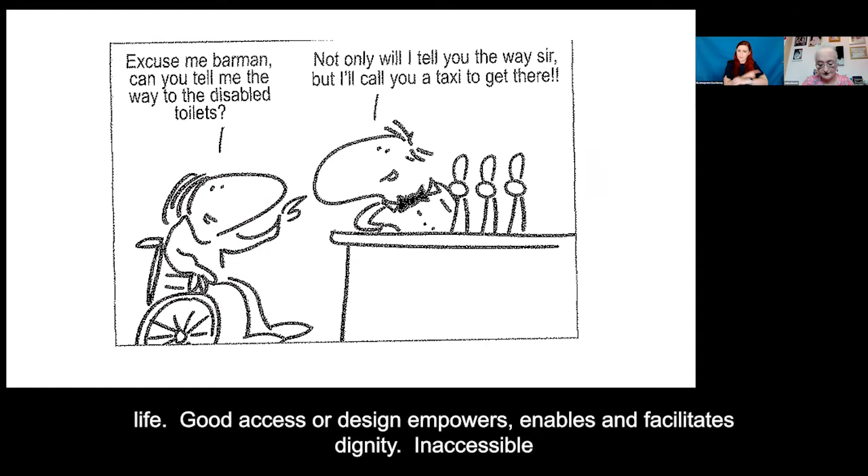Accessibility to the built environment significantly impacts on a person's everyday life. Good access or design empowers, enables, and facilitates dignity. Inaccessible environments create disabling barriers, which have a significant impact on the lives and choices of people with mobility impairments, and indeed our wider networks of family and friends.

The slide you'll see here today is a cartoon where the disabled person says, 'Excuse me, barman, can you tell me the way to the disabled toilets?' And the barman says, 'Not only will I tell you the way, sir, but I'll call you a taxi to get there.'

I sincerely hope that as we emerge from two years of lockdowns and restrictions, wider society may have gained a greater understanding of the impact that social interaction and freedom of access has on our mental and physical health and well-being. As a wheelchair user who often has to plan professional and social activities around accessible toilets, it was quite interesting, to use one word, to hear people on the radio complaining about temporary restrictions to access and public toilets being closed.

I'll come back to the issue of accessible toilets later in my presentation. We are here today to launch the new European standard on accessibility and usability of the built environment. But I think it's worth acknowledging the historical, societal benefits of universal design.

For example, voice-to-text software was originally created to facilitate the access needs of those who are unable to physically type or those who have literacy difficulties. However, these days, voice-to-text is a widely used communication method in business and general society. Automated doors make access easier for most people, and lower counters facilitate children and people who are of shorter stature.

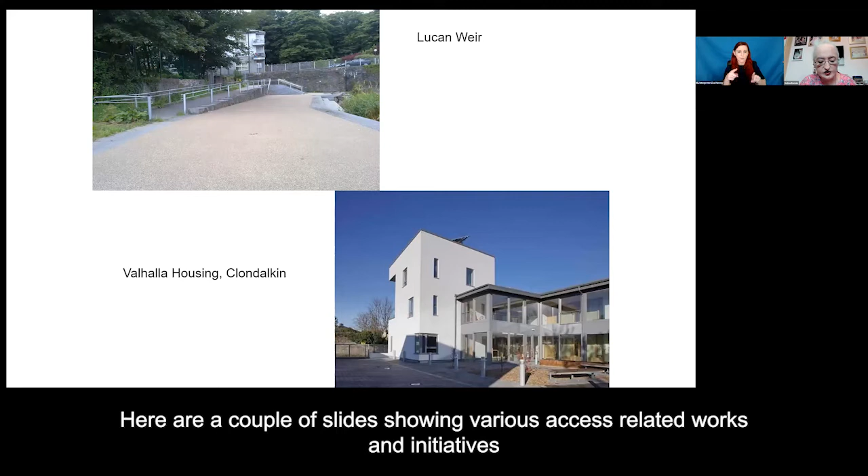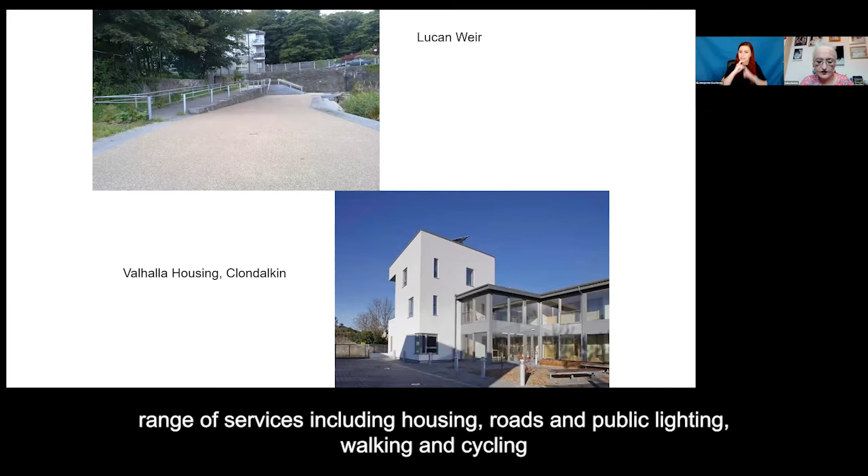What I have here now is just a couple of slides showing various access-related works and initiatives across South Dublin County. We have Lucan Weir and Valhalla Sustainable Accessible Housing in this first slide. South Dublin County Council provides and funds a broad range of services, including housing, roads and public lighting, walking and cycling routes, parks and playgrounds, libraries, litter control, art centres, and community infrastructure. It also serves as a platform for local democracy, with 40 councillors distributed across 6 electoral areas.

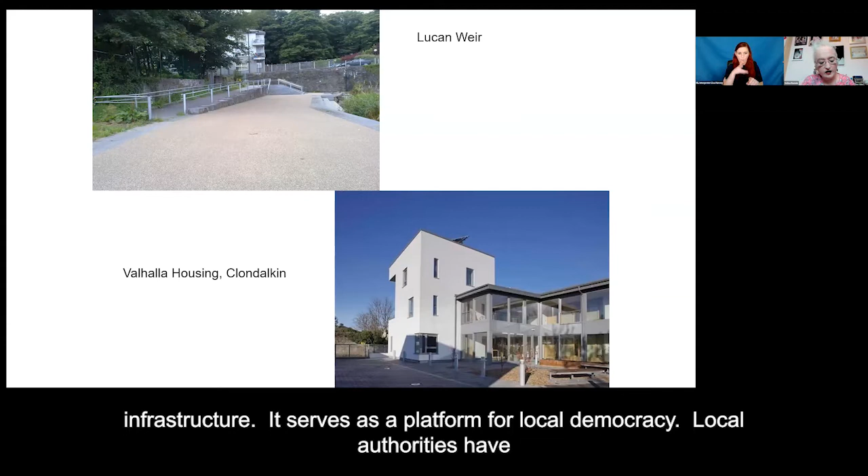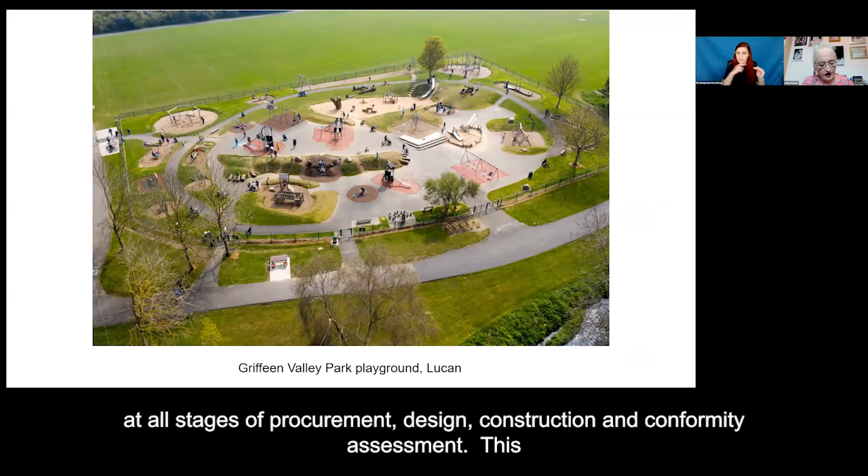Section 4.5 of the European standard states that accessibility should be integrated at all stages of procurement, design, construction, and conformity assessment. This way of working is not a new concept within South Dublin County Council. A core value of our corporate plan is inclusiveness, equality, and accessibility, and an overarching consideration with our current development plan includes a reference to creating socially and physically inclusive neighbourhoods.

I'd like to take a little moment to tell you about our inclusive play spaces programme to demonstrate this. The slide on screen now is an aerial shot of one of our accessible play spaces in Griffeen in Lucan. We build playgrounds and play spaces with the assumption they're places for everyone to play together. We see inclusiveness as centrally important to all of our play spaces and aim to create places that meet the diverse needs of children, their parents, their grandparents, and other caregivers.

We avoided plastics and used natural materials where possible. In addition to environmental and sustainable benefits, using natural materials has provided significant sensory benefits. And we've now started to focus on the design and installation of communication boards to further enhance the accessibility of the spaces.

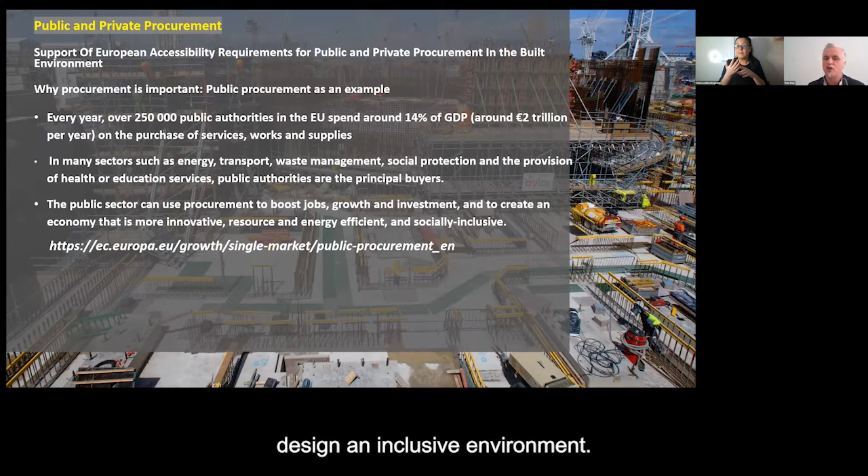Over 250,000 public authorities in the EU spend around 14% of GDP, that's 2 trillion euros, on the purchase of services, works, and supplies. A huge amount of money that could be used towards developing a more inclusive environment. In many sectors such as energy, transport, and waste management, public authorities are the principal buyers. The public sector can use procurement to boost jobs, growth, and investment. But most importantly, from the point of view of standards like this, it's a mechanism to procure, manage, operate, and design an inclusive environment.

So to go back for a moment to the three documents. The first, the main document, is scoped to describe basic minimum functional requirements and recommendations for an accessible, usable built environment following Design for All and Universal Design principles, which will facilitate equitable and safe use for a wide range of users including persons with disabilities. The requirements and recommendations are applicable across the full spectrum of the built environment, from outdoor and public spaces through to more detailed elements.

You'll see that spoken about in a little while. The functional accessibility and usability requirements are also applicable to existing buildings as well as new builds, so they're useful for adaptability and retrofit. I won't go through all of these, but the contents, as I said, go across the full spectrum of the built environment.

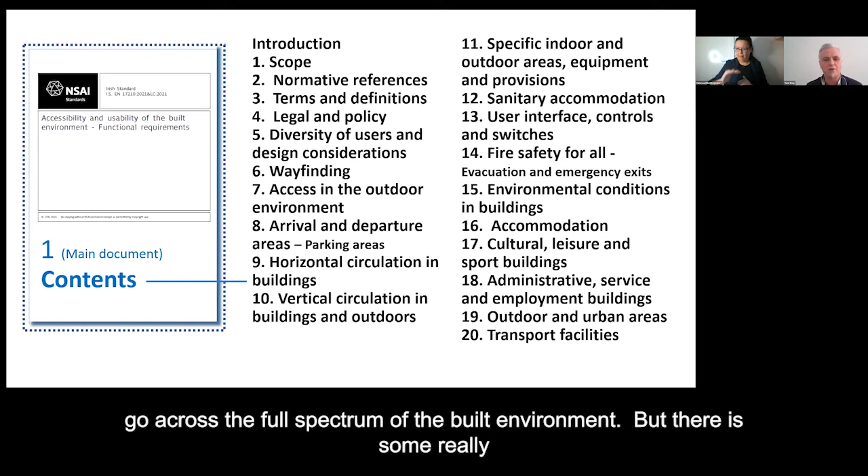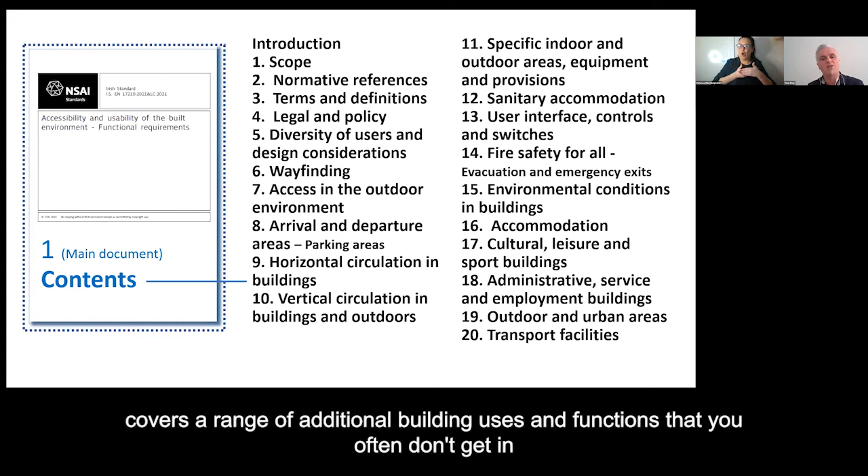There's some really great material here. Section 5 looks at diversities of users and design considerations, a fantastic piece of the document. Then we move from wayfinding and access in the outdoor environment through to very specific criteria for internal spaces such as sanitary accommodation. It also covers a range of additional building uses and functions you often don't get in standards like this, such as recommendations around cultural, leisure, administrative, outdoor leisure areas, transport facilities, and so on. So a very comprehensive document.

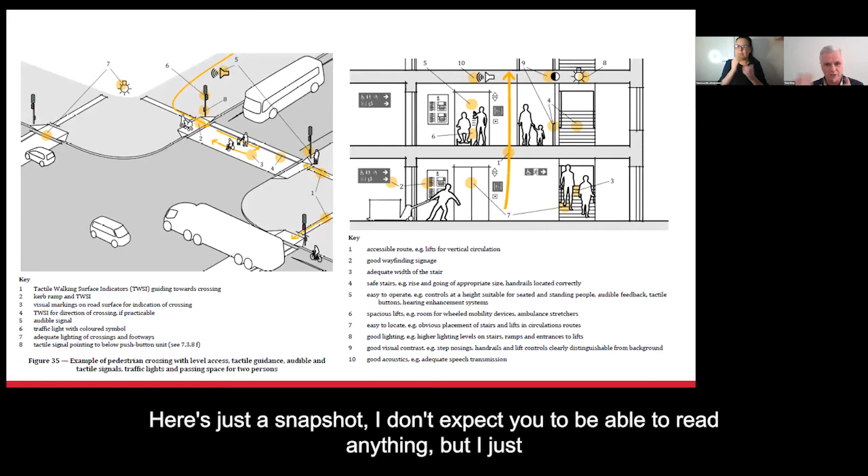Here's just a snapshot. I don't expect you to be able to read anything, but I want to give you a sense of the information contained in 17210. It's full of really fantastic illustrations, one of its real strong points, and these are used in a very powerful way to communicate some of the key messages.

Now to move on to the second document, the technical performance requirements and criteria. Here specific and detailed criteria are given to fulfill the requirements in 17210, and in that document you now start to see specific values and a lot of detail.

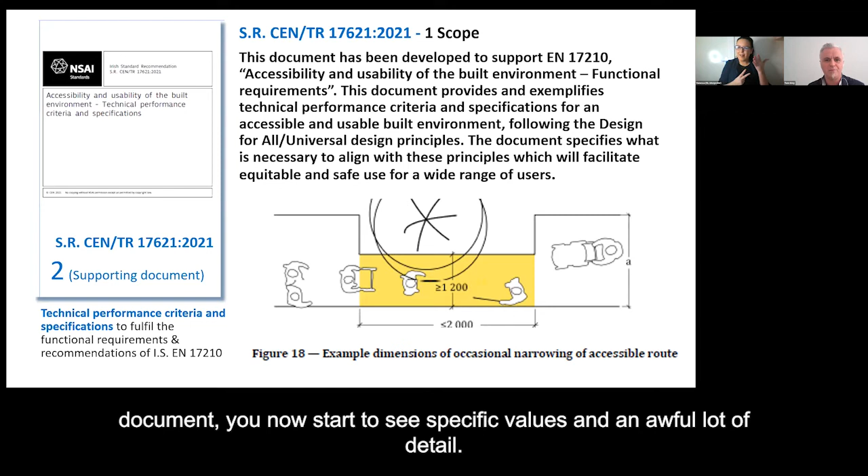Later on in the webinar we'll have Eoin, Caitríona, and Fionnuala, and they'll talk in a bit more detail about applying the standards and look at this in more depth, putting a bit of flesh on the bone, so to speak. But in the meantime, I'm going to hand you over to Ruth, who's going to give you a little bit of background and context. Thank you.

Thank you very much, Tom, for that introduction and background to the standards. Now I'm going to step back a level and talk about the context in terms of policy and legislation, the context in which we'll be using the standard.

Selina spoke to us about the impact the design of the built environment had on her everyday life. At the Centre for Excellence in Universal Design, we work to promote universal design as good design that works well for everyone, across the built environment, which is our focus today, but also across products, services, and ICT. In practice, the design of built environment, products and services, and ICT all need to come together for an overall design to be inclusive for everyone.

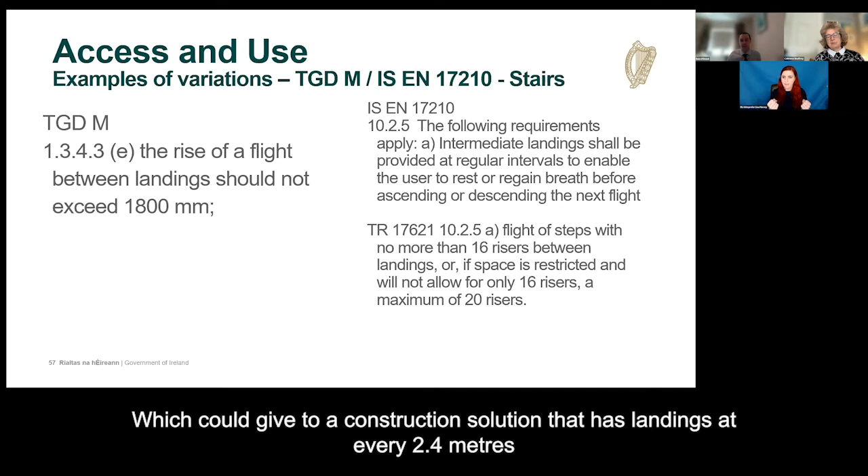Under the supporting standard TR 17621, it specifies 16 risers between landings, or spaces limited to no more than 20 risers, which could give a construction solution with landings at every 2.4 meters, different from that of TGDM. So in designing buildings, care does need to be taken to make sure that the minimum standards are being met.

At the moment, Technical Guidance Document M is out for draft public consultation to enhance its provisions to include changing places facilities in the built environment, to facilitate greater use of the built environment by individuals irrespective of ability.

Under 17210, the requirements for changing places facilities are specified for large transport facilities, roadside petrol service facilities, retail and leisure complexes, without going into detail of what constitutes a large transport facility or a large service facility.

When we look at the proposed list of requirements in TGDM, there's a far broader scope of application of the CP facilities: hospitals, care centres, assembly buildings, schools, offices, shops, shopping centres, hotels, etc., with minimum floor areas or area capacities that apply and are specified in detail in the TGD.

So again, EN 17210 can be used as an alternative approach. The provision is made in legislation. However, care needs to be taken in the use and direct application of the provisions, to make sure that the minimum performances in the TGD are still being met and that the policies set out through the TGDs are being obtained.

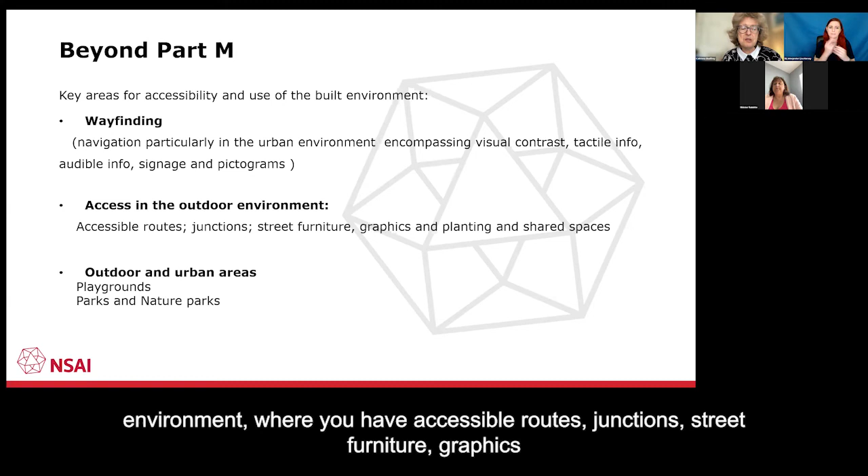These all come into play very much in the main areas I'm going to speak about, which are wayfinding, particularly navigation in the urban environment, where visual contrast, tactile info, audible info, signage and pictograms all come into play and sometimes conflict with and cause confusion. Access in the outdoor environment, where you've got accessible routes, junctions, street furniture, graphics and planting, and shared spaces, which is both a positive and a difficult thing to do very well.

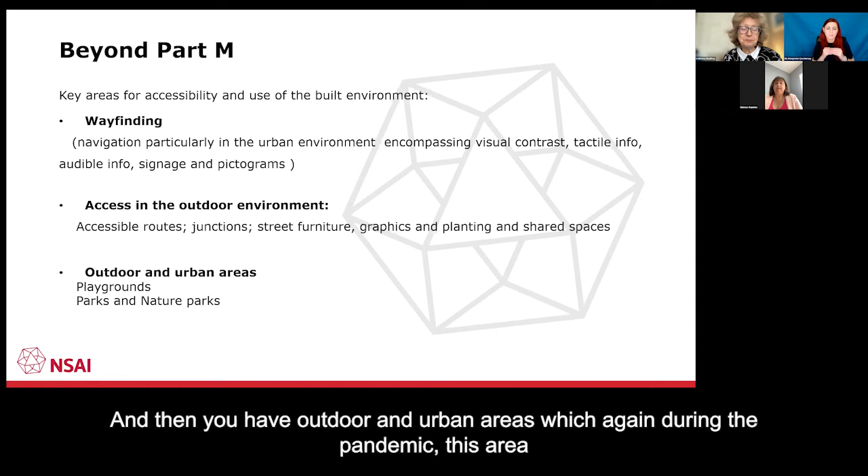And then you have outdoor and urban areas, which again, during the pandemic, this area became so much more important to all of us. Playgrounds, parks and nature parks, and access to green spaces.

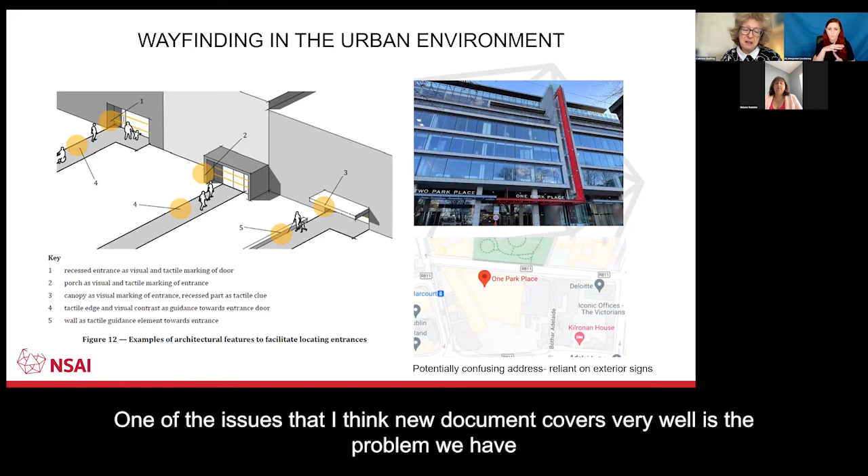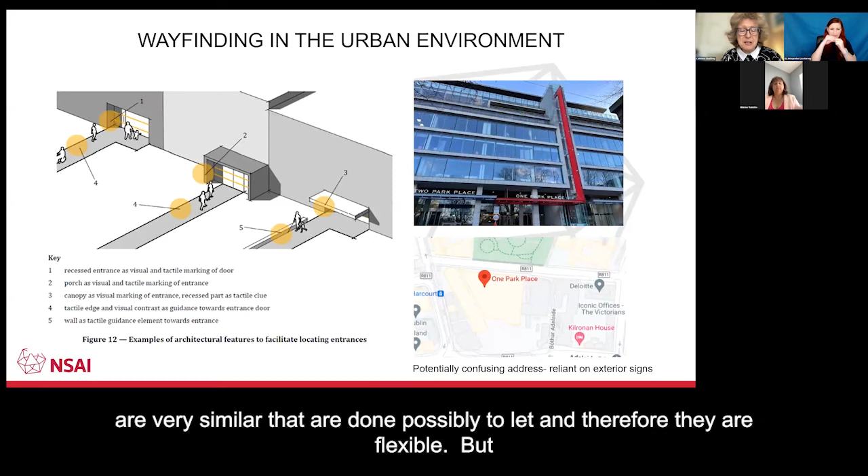Now in the next slide, you'll see in terms of, could I have the next slide please, wayfinding in the urban environment. One of the issues that I think this new document covers very well is the problem we have with modern buildings, particularly in large estates, where you have buildings that are very similar, done possibly to let, and therefore they are flexible. But because they're flexible, they lack an awful lot of character and indicative marks.

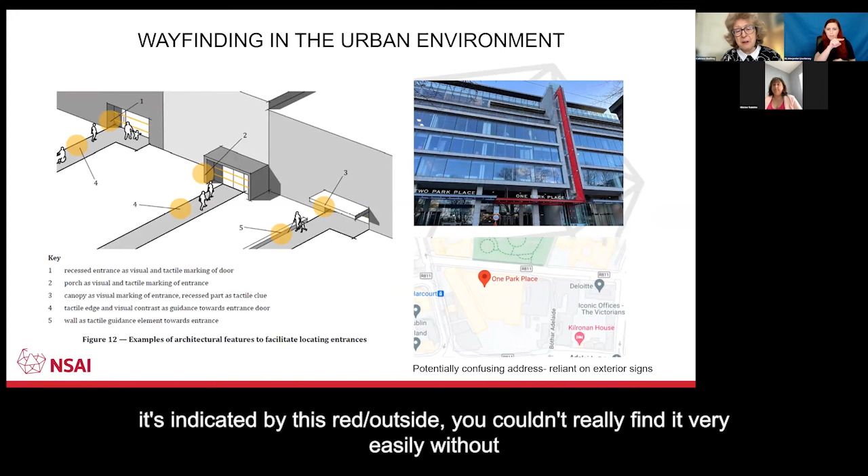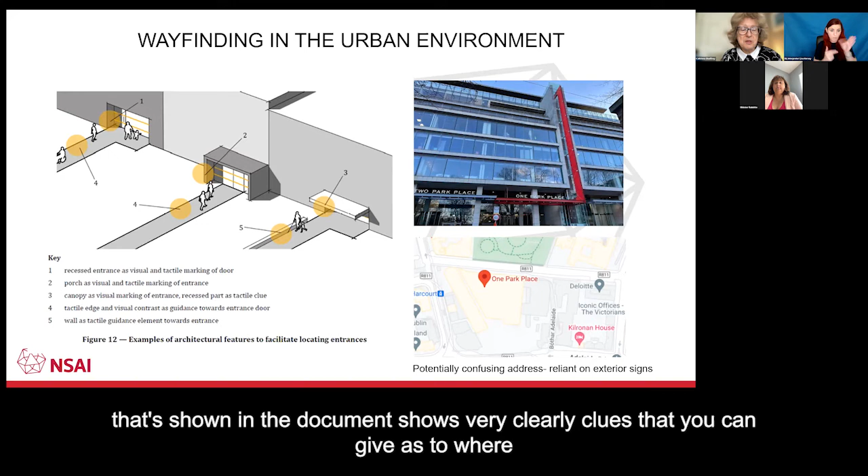So you find, say for example, here on the right-hand side, you've got a building halfway down a street, or nearly halfway, and it's called Number 1 Park Place, indicated by this red slash outside. You couldn't really find it very easily without that. So this is where graphics has to be applied to a building. And the diagram shown in the document shows very clearly clues that you can give as to where an entrance might be and how you would highlight it.

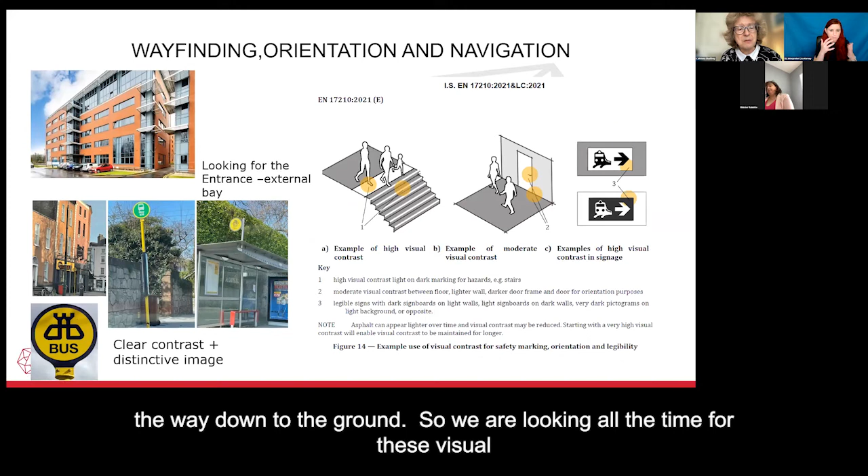Could I have the next slide please? So again, on the top left there, you can see a building where the only clue you have as to where the entrance might be is because there's a projecting bay that goes all the way down to the ground. So we're looking all the time for these visual clues.

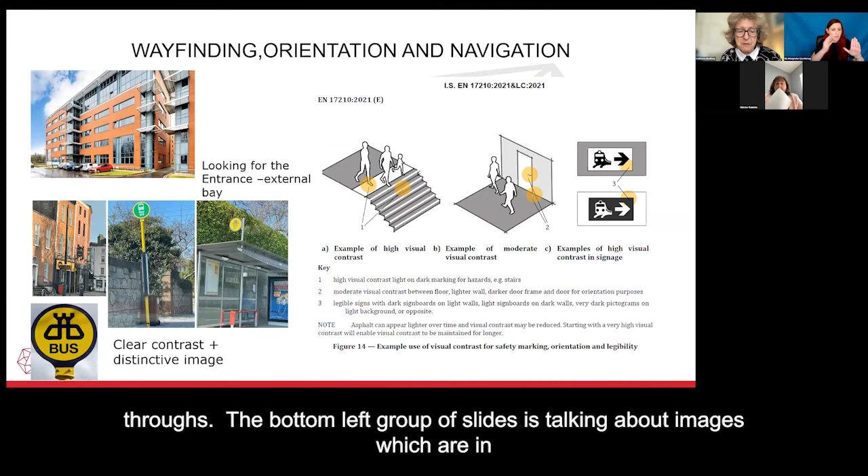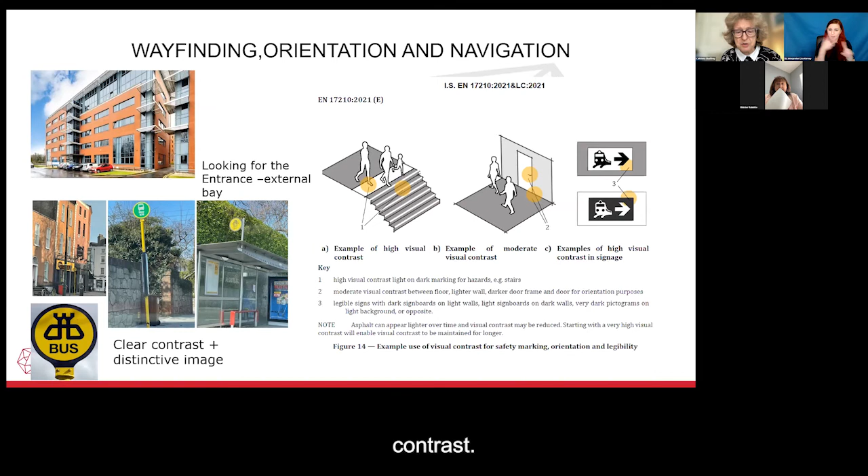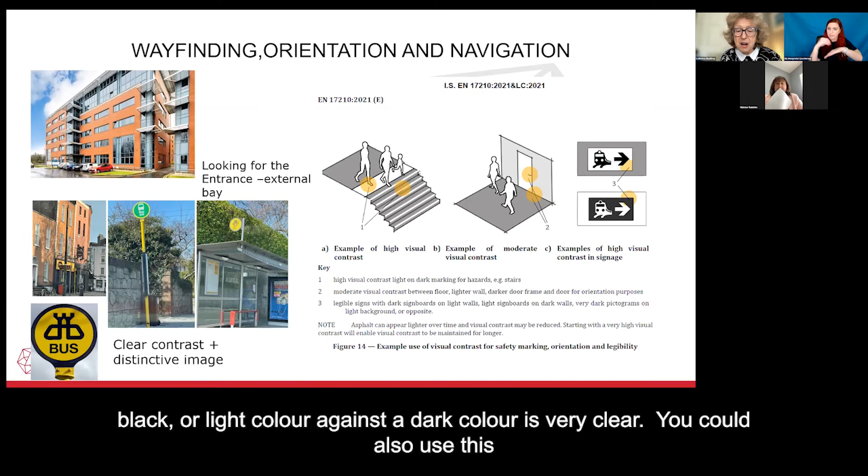Also, when you have signage, you have good contrast, you know, black on white or white on black, or light color against a dark color is very clear. You can also use this to highlight things like doorways or steps so that you know when or where the hazard is going to be. Could I have the next slide please?

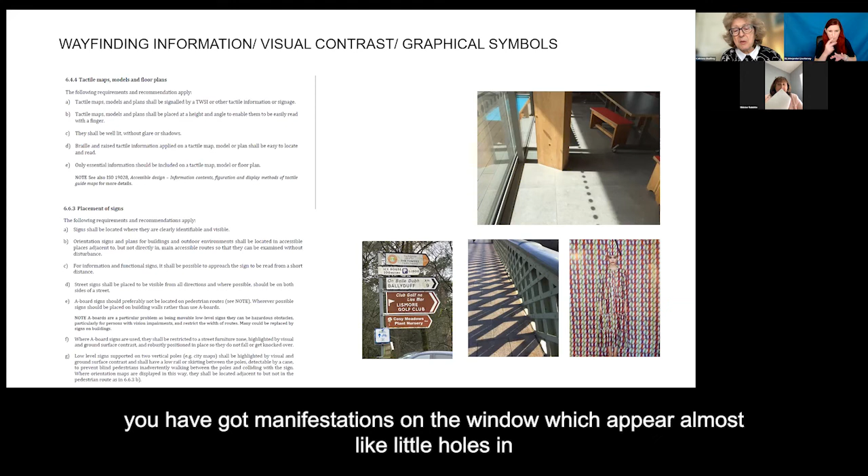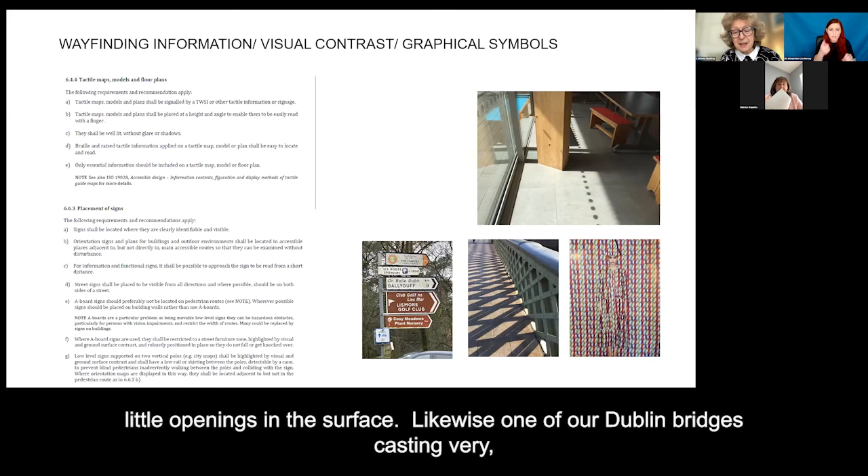One of the difficult things is pattern and people not fully understanding it. The bottom image shows someone wearing clothes the same color as the background, making it hard to discern the object. Top right shows manifestations on a window appearing like little holes in the surface, which can be difficult for people with dementia, who think there are openings there. One of our Dublin bridges casts big shadows that could read as an obstacle, but it's just sunlight. The bottom left shows how a plethora of signs makes it hard to focus and read clearly.

Could I have the next slide, please?

Could I have the next slide, please?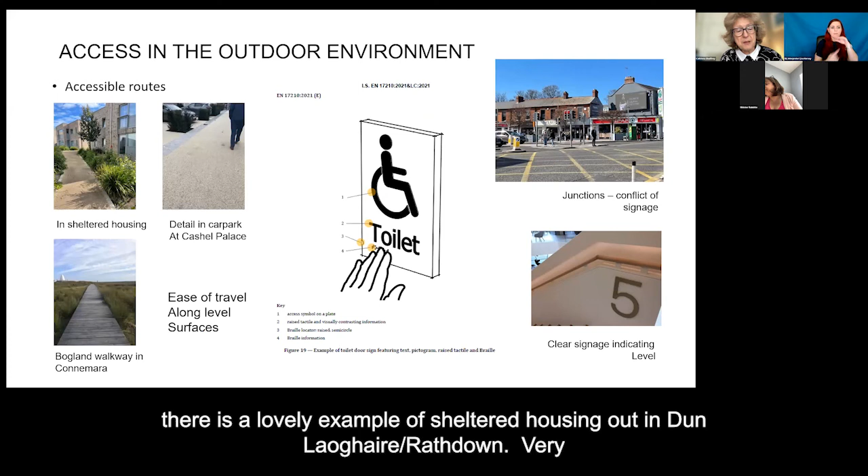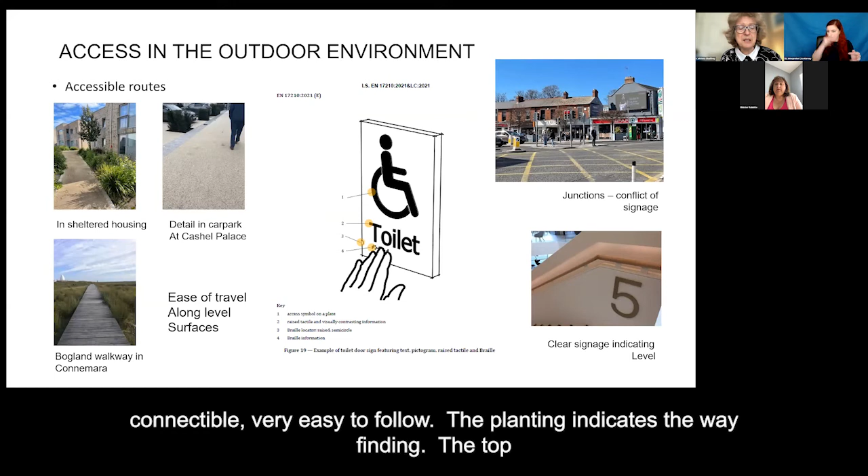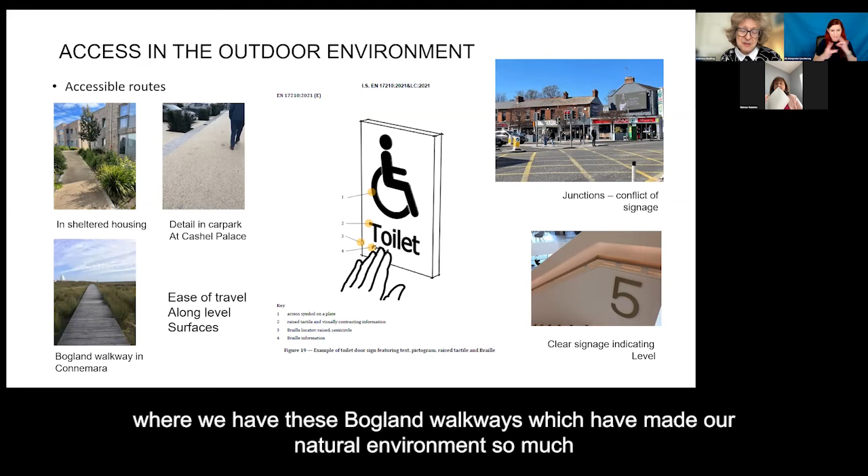In the outdoor environment, this is an area that has really improved, and this document will help pull it along further. The top left photo is a lovely example of sheltered housing in Dun Laoghaire-Rathdown - very connectable, easy to follow, with planting indicating the wayfinding. Top right is a recently completed car park at Cashel Palace with level surfaces and good drainage, not a trip hazard. Bottom left shows bogland walkways that have made our natural environment much more accessible to buggies, wheelchairs, and the general public.

Then there are areas like the top right, where there's a serious conflict of signage - so much going on that it's really difficult to know exactly when and where you should cross.

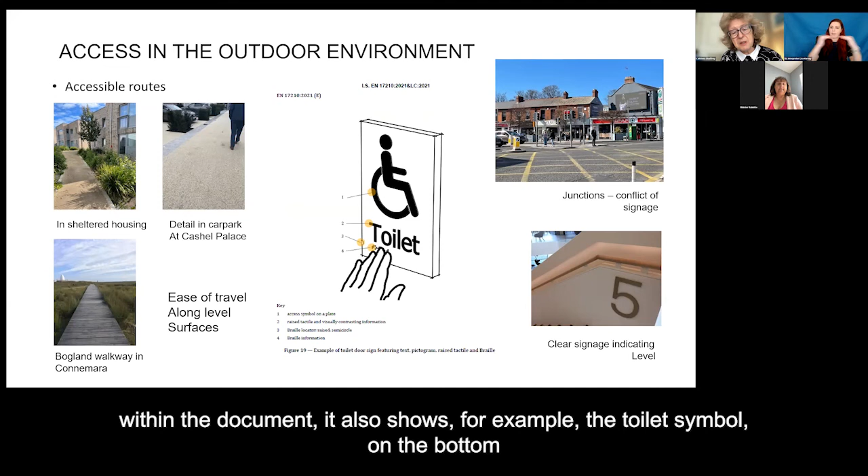Clear signage, like this example inside a building, is very simple and obvious - you're going to level 5. The document also shows the toilet symbol, and on the bottom left, symbol 3 has a little indicator showing where the Braille and raised lettering will be, so it's very clear what's going on where.

Could I have the next slide, please?

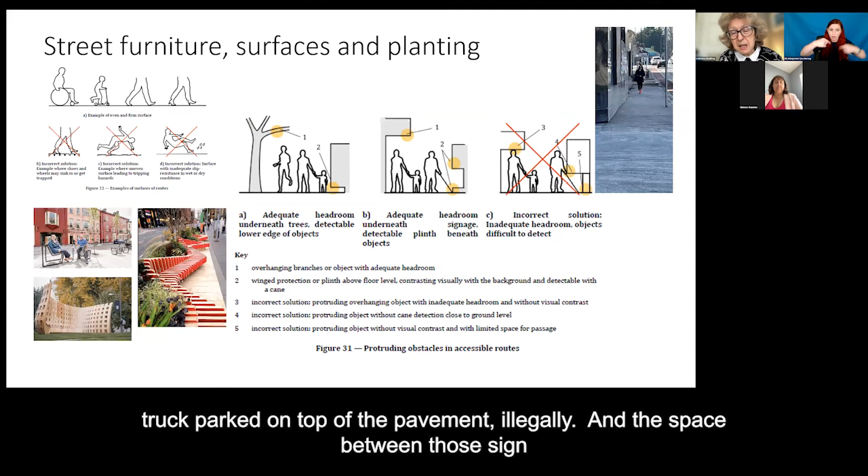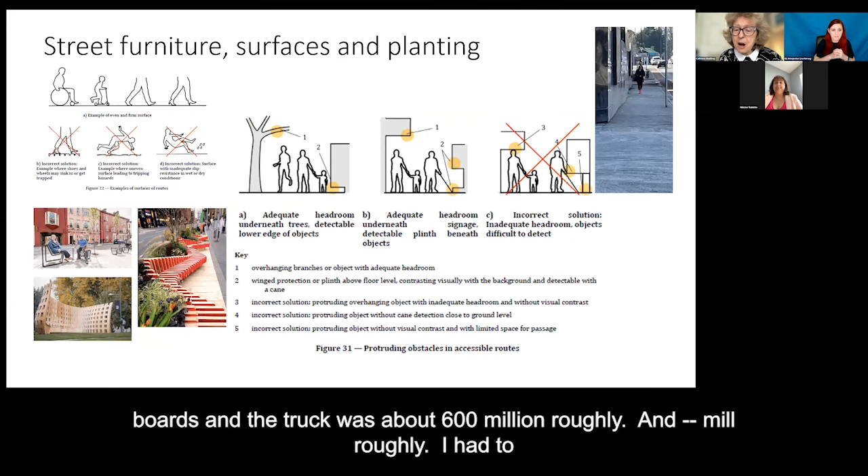Again, street furniture and planting - the top right slide illustrates a situation I want to describe. I was with someone visually impaired, and there was a large truck illegally parked on the pavement. The space between the signboards and the truck was about 600 mil, and I had to grab her arm to stop her walking into a projecting sign that extended about 150 mil, when only 100 mil is allowed. Normally she wouldn't have walked that close, but because the truck was there, she was walking closer to the boundary wall.

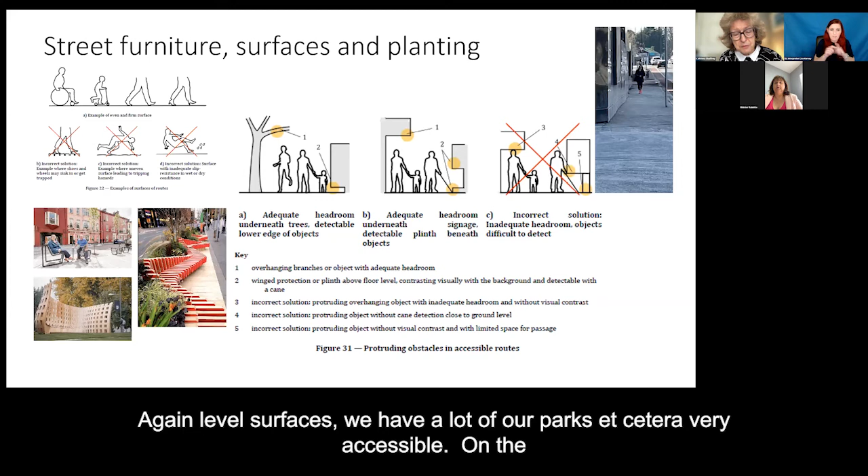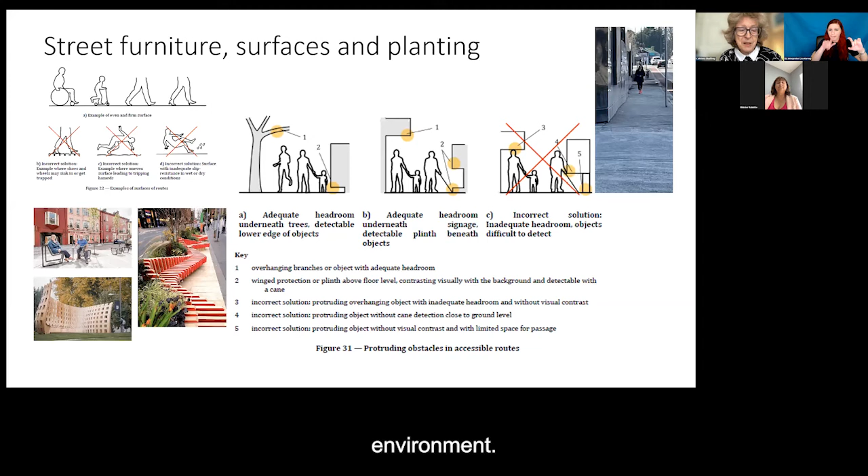Again, level surfaces - this is an area that's improved hugely, with many of our parks now very accessible. In the bottom slides, the top one is Clonakilty, a wonderful example of a street where older people can sit and rest, making for a very convivial environment. The other two illustrations show breakups of areas which make them much more accessible.

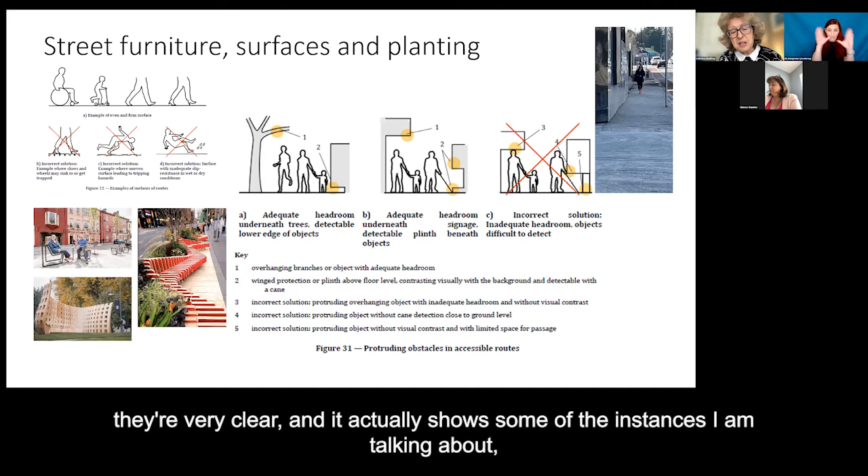These diagrams in the middle are all from the document, and I think they're very clear. They show instances where problems can arise that are to some degree unforeseen, particularly things like tree branches that need to be maintained.

Could I have the next slide, please?

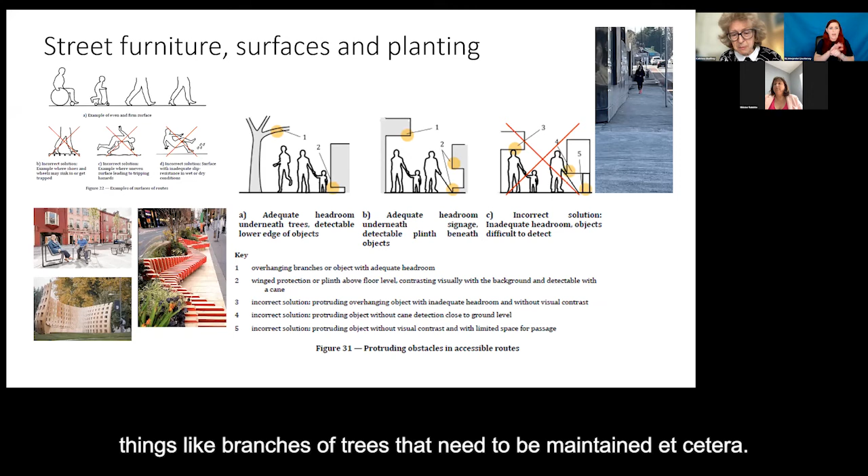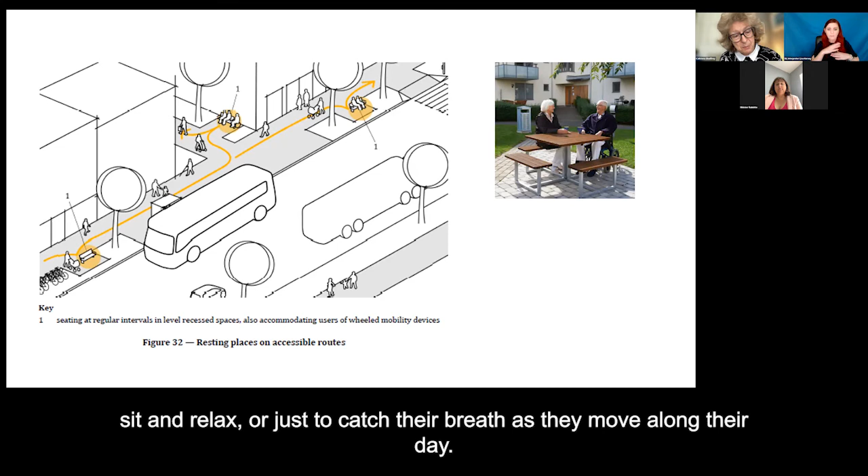Again, when we're designing our city streets, having places to stop and sit, to break up spaces so that it's not just all about the traffic flow. There are places like this where you have seating, again, possibly for older people, giving them space to sit and relax or just to catch their breath as they move along their day.

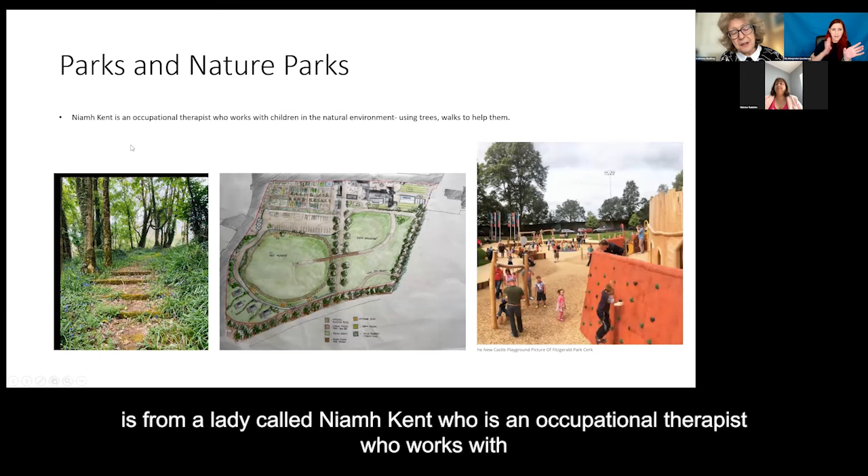Next slide, please. One of the areas that's improved hugely, I put in this slide - the bottom left slide is from a lady called Niamh Kent, who's an occupational therapist who works with children in the natural environment. Children with trouble, she gets them to hang upside down out of trees. So again, our green, diverse spaces are becoming more and more useful.

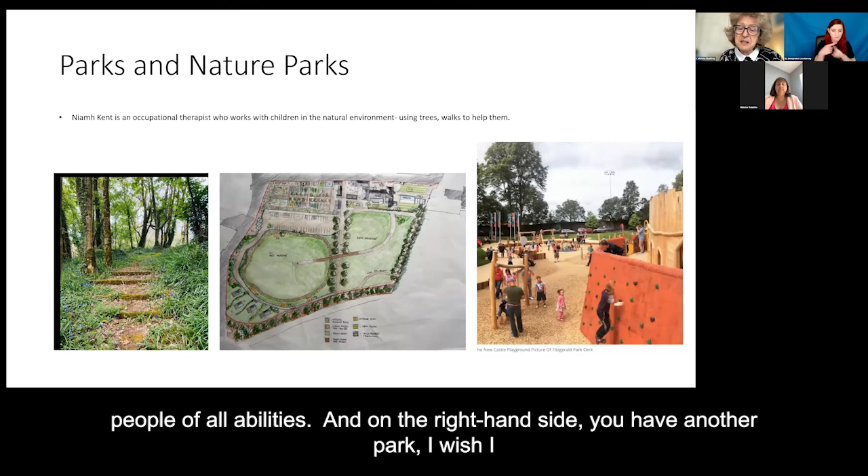The middle illustration is a potential play link area for children, for people of all abilities. And on the right-hand side, you have another park. I wish I had seen the earlier park that Selina had. It looked like a really interesting space. Next slide, please.

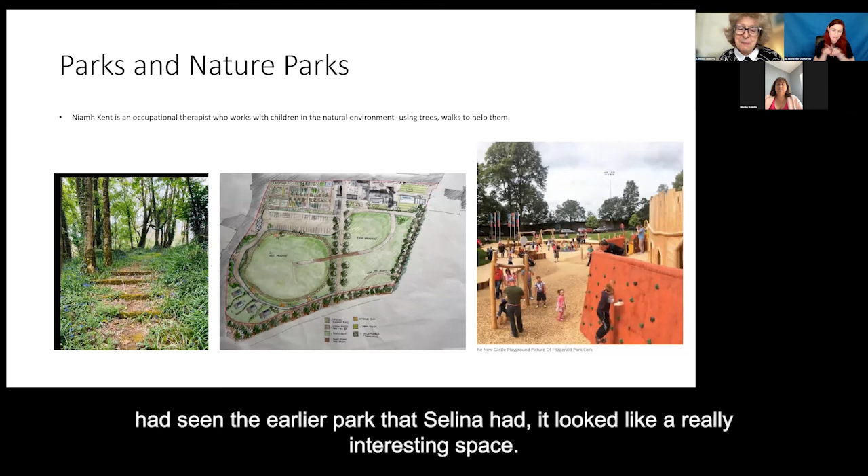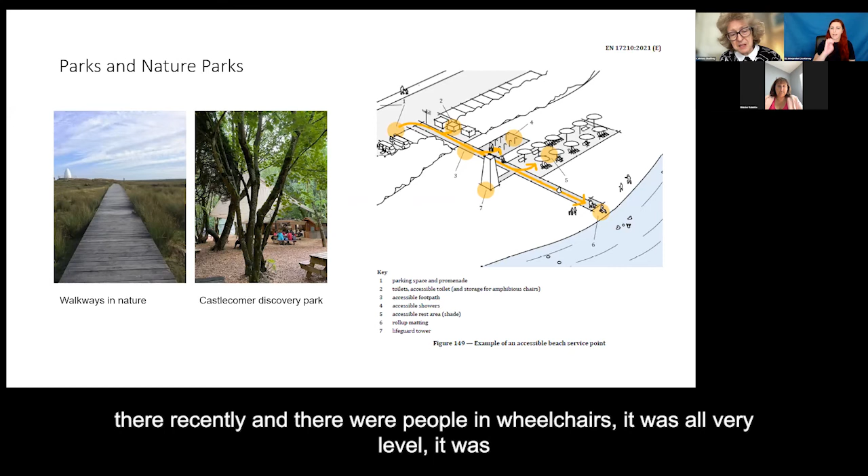Again, walkways in nature, just talking about parks and nature. This is again where the document really starts pulling things on for us, making us look at things, how we can improve, how we can develop. This is Castlecomer Discovery Park. I was down there recently and there were people in wheelchairs. It was all very level. It was all very easy, which is, I think, how it should be.

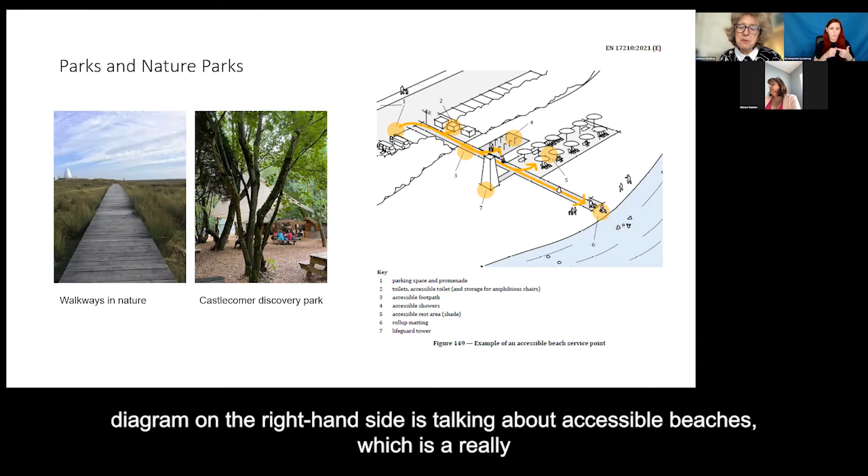And the other diagram on the right-hand side is talking about accessible beaches, which is a really interesting area and a really good area that should be looked at very closely. Next slide, please. So in conclusion, EN 17210 brings more detail to the external environment, but there are further developments that are likely to happen. And the next section on problems that arise in practice will now be illustrated in the next presentation by Fionnuala Rogerson. Thank you very much.

Thank you very much, Caitríona and Eoin. I suppose setting the national context, it's not straightforward how standards be integrated not only at a national level, at a regulatory level, but also as Caitríona highlighted, the practical issues on the ground that we still have to resolve and work through. So we have next Fionnuala Rogerson, who is a Fellow of the Royal Institute of Architects in Ireland.

A practicing architect and author of several publications on universal and inclusive design. For over 20 years, she was director of the International Union of Architects work program Architects for All, working with architects globally to promote inclusive universal design as a fundamental component of architectural quality and sustainable built environments. She was a member of the CEN research team, which completed the first stage of the EU mandate, leading to the development of EN 17210. She is currently working with several NSAI and ISO standards committees on accessibility and usability of the built environment, including heritage sites. So delighted to have Fionnuala here presenting.

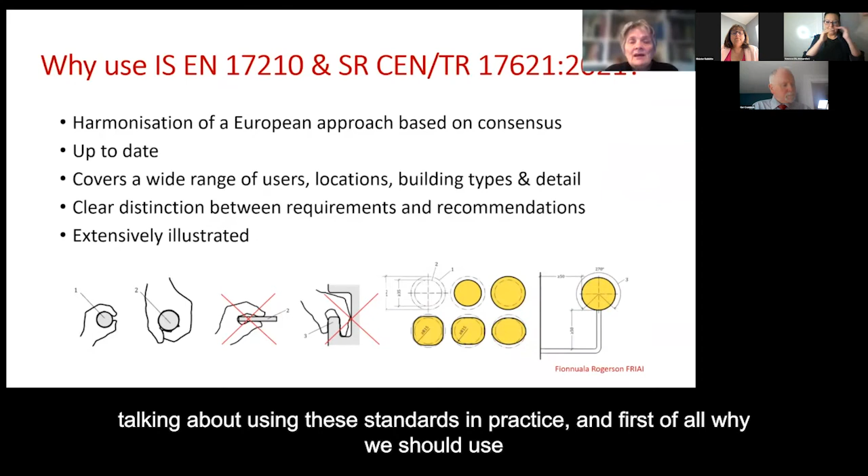Thank you, Ger. Hello, everybody. I'm delighted to be here with you today. I'm going to be talking about using these standards in practice, and first of all, why we should use them.

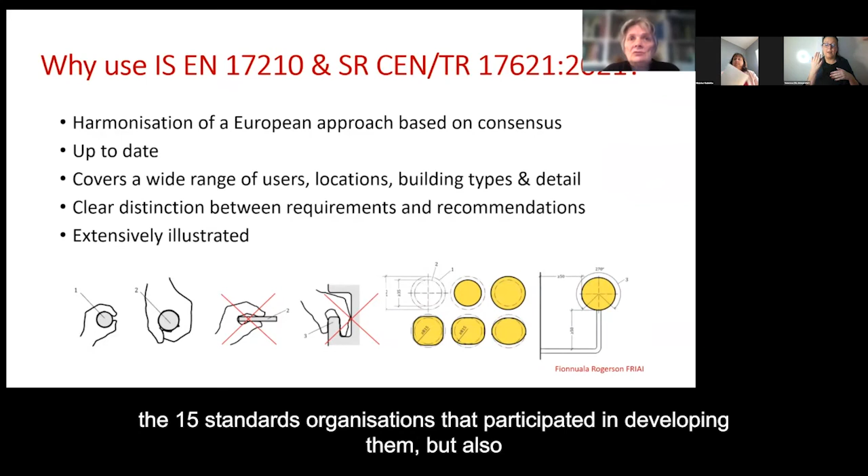They cover a wide range of users, locations, building types, and details. There's a clear distinction made between the requirements and the recommendations, which I'll explain further on. And they're extensively illustrated, which is quite unusual for standards. Particularly for us as architects, it's great to have a standard that is illustrated, not only with good examples, but also it does show some examples of what not to do. And in the TR, it gives examples of the technical requirements in graphic form.

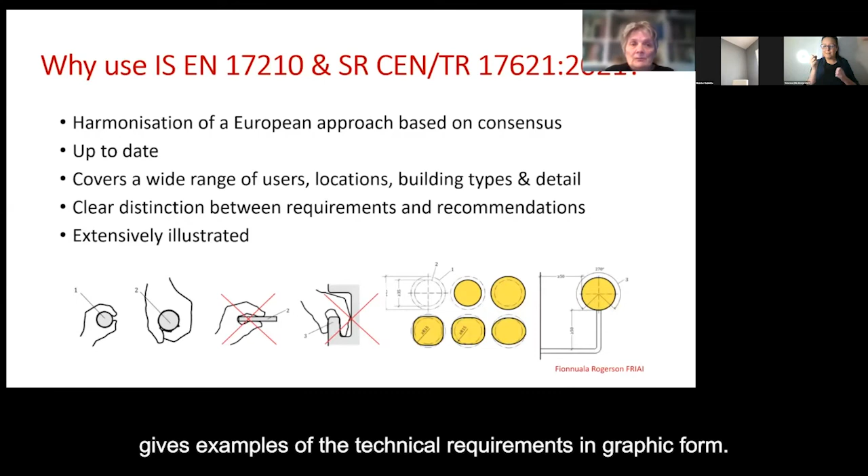The diversity of users and design considerations that are not covered by the technical guidance document Part M include things such as immunological functions, allergies and hypersensitivities, physical abilities, whilst Part M includes or is based on independent use of the built environment. The EN 17210 also includes situations where people may require assistance, voice and speech functions, and also cognitive abilities and characteristics such as perception, memory, decision-making, dyslexia, dementia, and autism, amongst others.

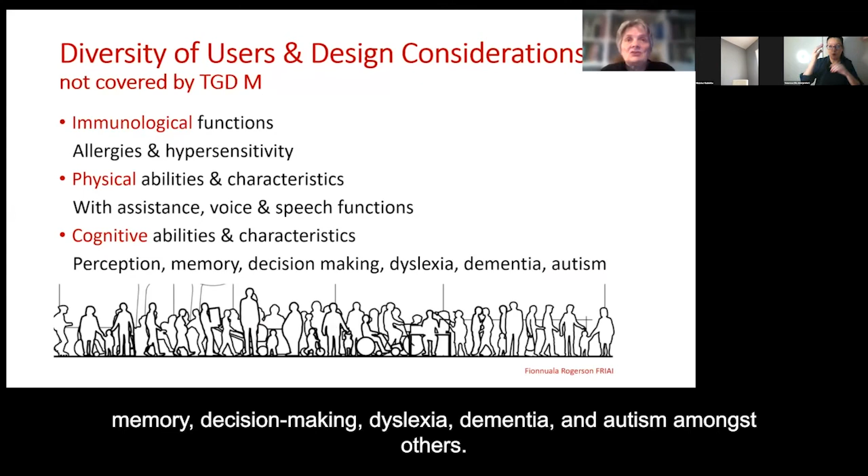Basic functional requirements which aren't covered in the technical guidance document include wayfinding, which Caitríona has spoken a little about. Outdoors, she also mentioned routes, plazas, shared space, guidance paths, bridges, underpasses, and the like. It covers a lot of external areas such as arrival and departure areas.

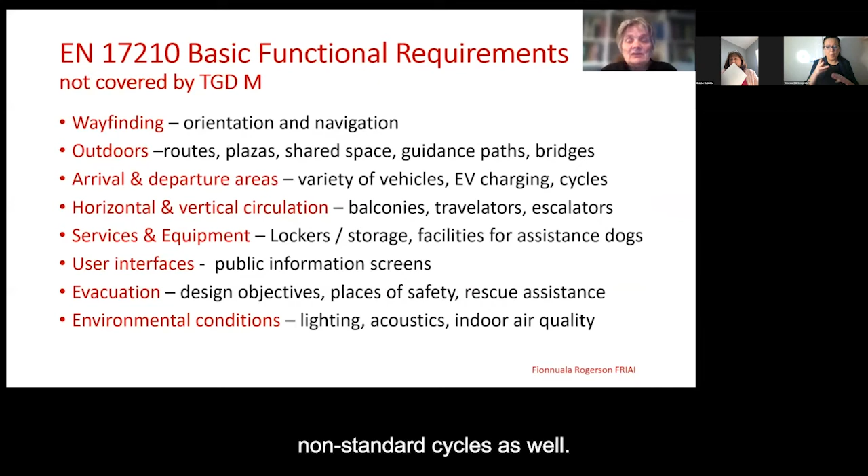It covers the kind of variety of vehicles that you would normally meet, not just cars, but also coaches, taxis, minibuses with side access, rear access, electric vehicle charging, cycles and non-standard cycles, which more and more people are beginning to use to mobilize in urban areas, and parking for non-standard cycles as well. The kinds of things that aren't covered under M in relation to horizontal and vertical circulation include travelators.

And escalators. There's guidance on balconies, and this is something that we've had recent problems with, which have had to be referred to An Bord Pleanála to make a decision on in relation to the TGD.

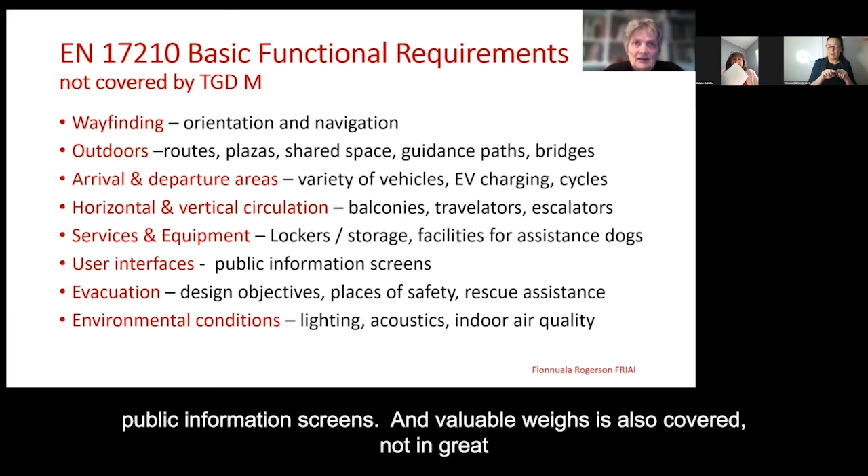Services and equipment, facilities for assistance dogs are covered, lockers, storage, public information screens, and evacuation is also covered, not in great detail, but there is quite a detailed informative annex to the standard. You will understand the design objectives, issues such as places of safety and rescue assistance, and also covered are environmental conditions such as acoustics and indoor air quality.

Specific uses covered in 17210 that aren't covered by the technical guidance document include student accommodation, adaptable housing, libraries, museums, heritage buildings, gyms, swimming pools, and many others.

Types of administration, service and employment buildings such as banks and courts, police stations, offices, industrial, educational, healthcare facilities, as well as religious facilities. And then outdoor and urban areas, including playgrounds, gardens, parks, and beaches.

And finally, transport facilities, train stations, bus stations, coaches, metros, airports, ports, even cable cars are covered.

So when you're using the document, I believe you need the two principal documents, 17210, which is the functional standard, the functional requirements, and 17621, which is the technical report, which gives the technical detail, which assists in demonstrating that you have actually complied with the functional requirement.

So within 17210, you have a clear distinction between the things that are requirements in order to comply with the functional standard, illustrated with reference to the word 'shall'. For example, functional issues for a museum display will be described such as: exhibits shall be placed at a height accommodating everyone, captions shall be positioned at suitable height, and then when it's making a recommendation, it will describe it as a 'should'.

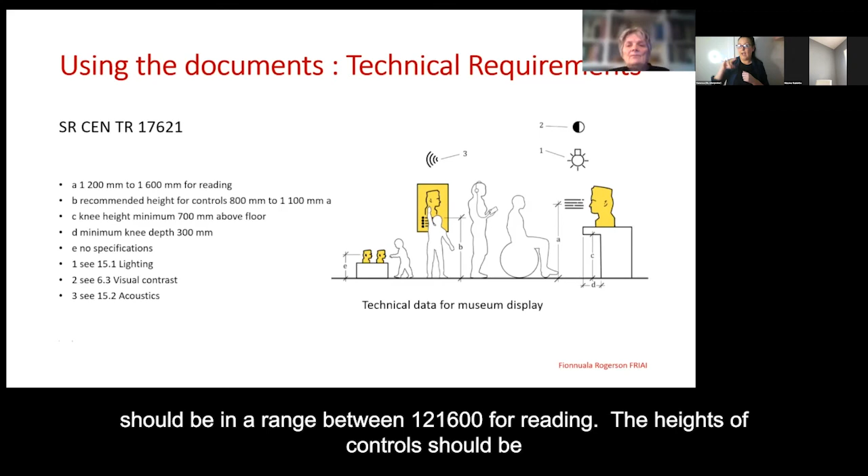Technical report 17621, you will have the same illustration with the same details, the same topics, but in this case it will give the technical requirements. For example, for a standing height user, the height of exhibits should be in a range between 1200 and 1600 for reading. The heights of controls should be at a specific height. For lighting, you're then cross-referenced back to the technical details for the levels of lighting, acoustics, visual contrast, and so on.

So you need always to cross-reference from the functional standard 17210 to the technical report 17621.

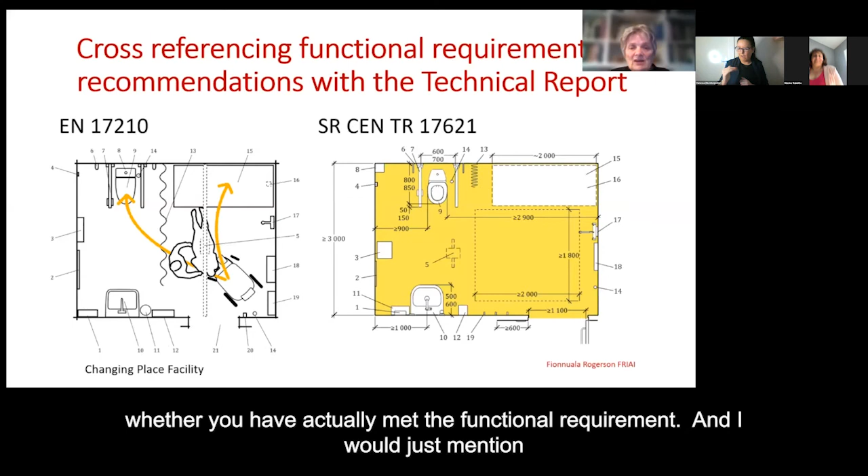Here I've just taken an example of the information provided on changing place facilities. On the left-hand side, you'll see an illustration of what is required as a function of a changing place facility, and on the right-hand side, the technical details that allow you to check whether you have actually met the functional requirement.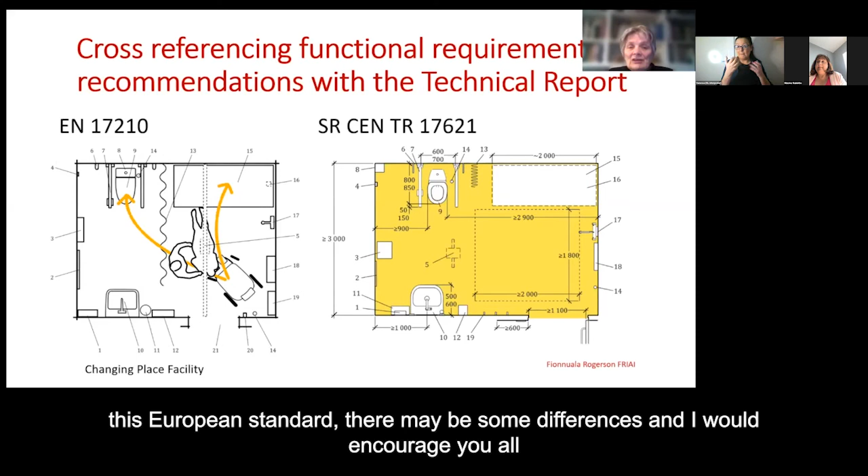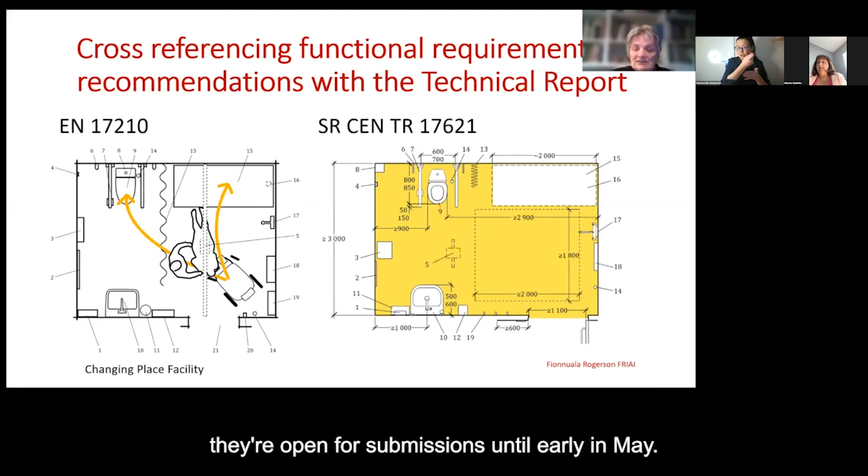I would just mention here that the draft consultation document out for the revised Part M of the building regulations, to include data on changing place facilities, is out for consultation at the moment, and I believe it has been based very much on what's in this European standard. There may be some differences, and I would encourage you all to refer to the consultation document and make submissions as you see fit. I believe they're open for submissions until early in May.

The third document, or technical report, that comes with this standard is one on conformity assessment. It describes very simply how to assess conformity based on the types of conformity, whether it's first, second, or third party—first party being self-certification—the types of functional requirements you need to consider when determining which should be applied, the reference documents you may use to ensure you have conformed to national standards, which could be building regulations or this technical report 17621, the methodology to use, and then the stages at which you should assess conformity.

And these would be inception, planning, construction, and completion.

And then there are some sample tools and templates that can be used. We're pretty well used to doing this now as designers, those of us who have acted as either an assigned certifier or design certifier, and the procedures we would normally use to assess conformity throughout the design process and through construction and on completion would be somewhat similar. So we would be used to using this type of tool.

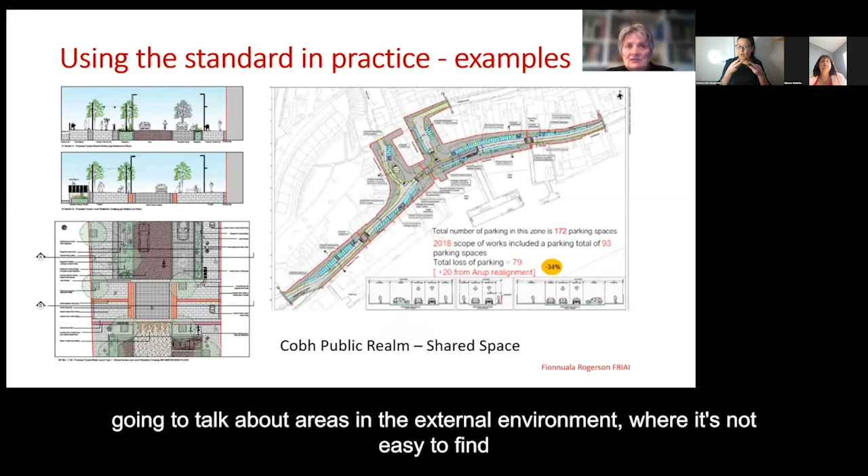I would just like to move on to giving a couple of examples of how we've been able to use the European norm in practice. In both of these examples, I'm going to talk about areas in the external environment where it's not easy to find good guidance in relation to external environments and accessibility and usability, because Part M doesn't really cover them.

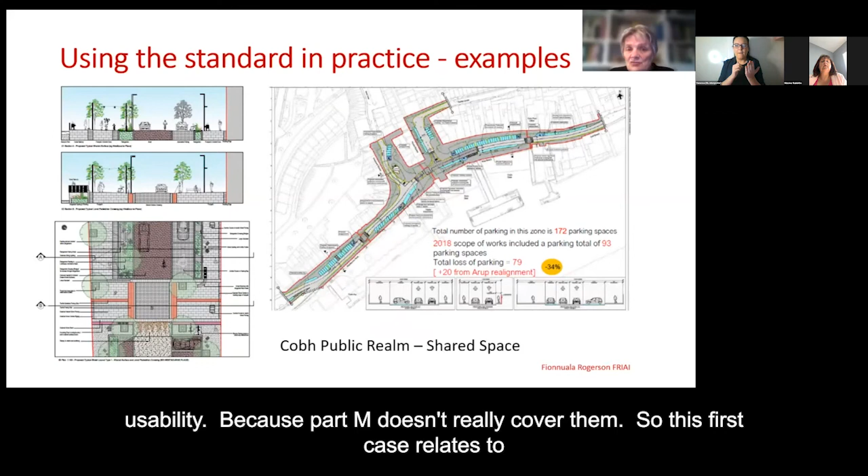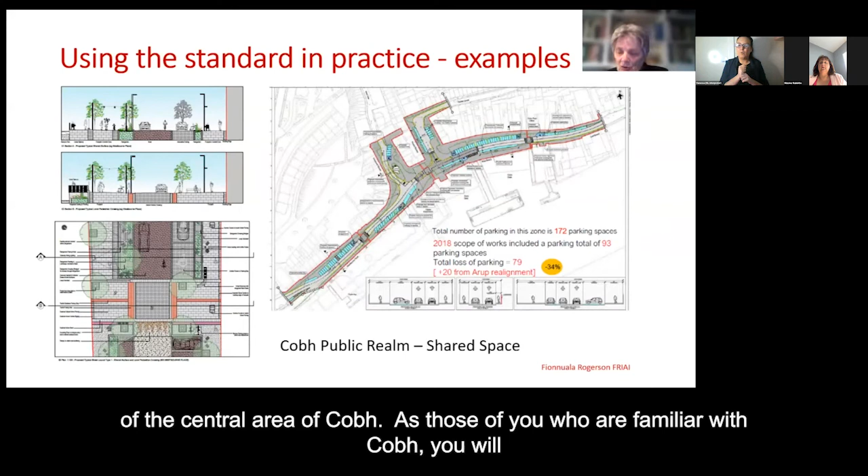This first case relates to the Cobh Public Realm Enhancement Plan, currently being done by Cork County Council and Julie Vallone, who many of you will know, which is about the revitalisation of the central area of Cobh. As those of you familiar with Cobh will know, it's very heavily trafficked with lots of car parking and movement in the centre of the town, and it has taken a lot from the sense of place that one might otherwise have had a couple of centuries ago in this historic and hillside town.

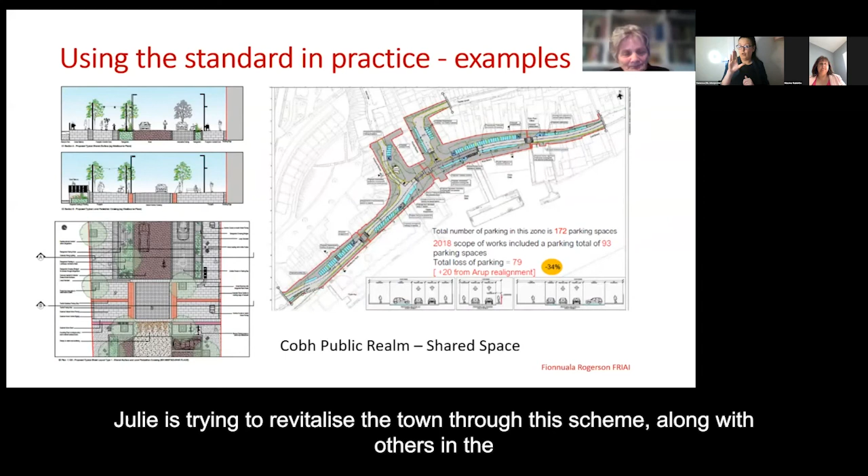Julie is trying to revitalise the town through this scheme, along with others in the County Council, and has had a lot of consultation with residents and visitors and organisations concerned.

When she approached us, and we in turn approached the National Council for the Blind in Ireland to look at some of the detail of this area, to carry out an access audit first of all, and then to advise and discuss one of her proposals, which was to use shared spaces throughout the central part of the town.

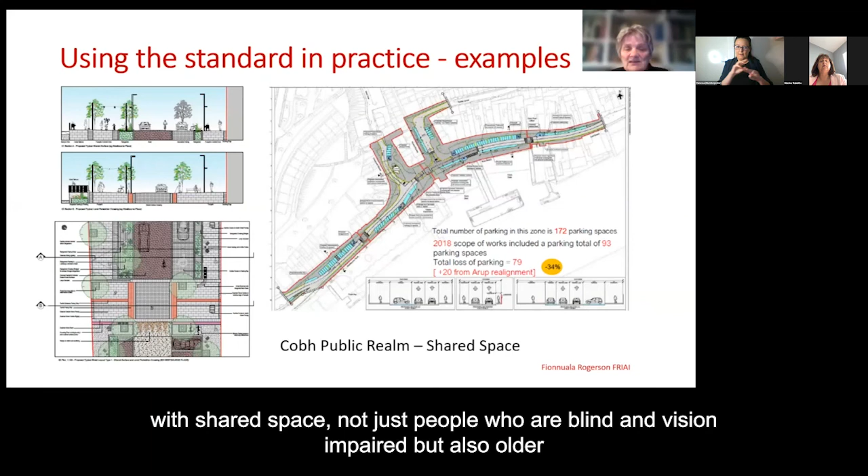Now, for those of you familiar with shared space, you'll know that it's quite a contentious topic. Many people who are blind or vision impaired are not very happy with shared space, not just people who are blind and vision impaired, but also older people and people with children can be quite nervous in using shared space.

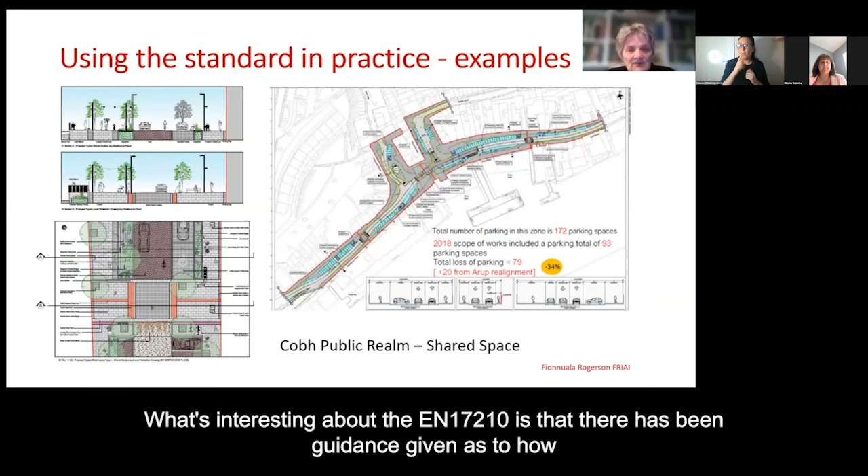So what's interesting about the EN 17210 is that there has been guidance given as to how shared space might be designed in such a way as to be acceptable to all users.

So in working with Julia and with NCBI, we used the principles established in 17210: the principle of creating gateways at the arrival to an area that then uses shared space, creating comfort zones, meaning having spaces which would be pedestrian only, and even though it's on a level surface with the shared space or the carriageway area, they are nonetheless defined using the criteria given in the EN to ensure they are identified as safe comfort zones.

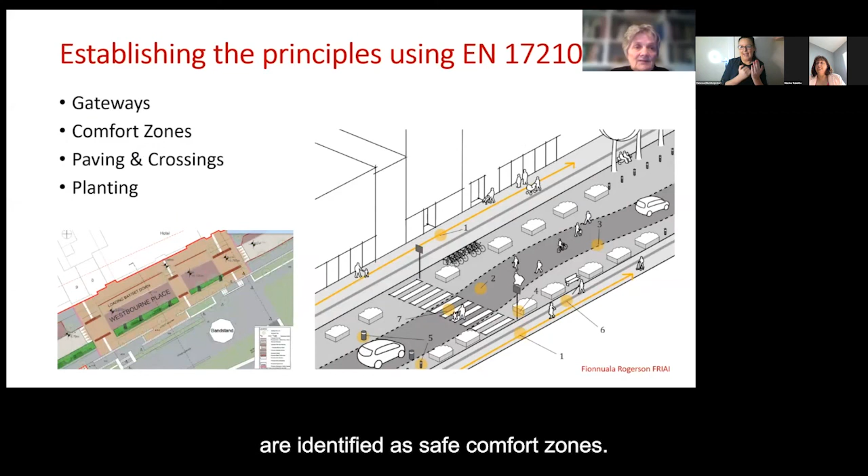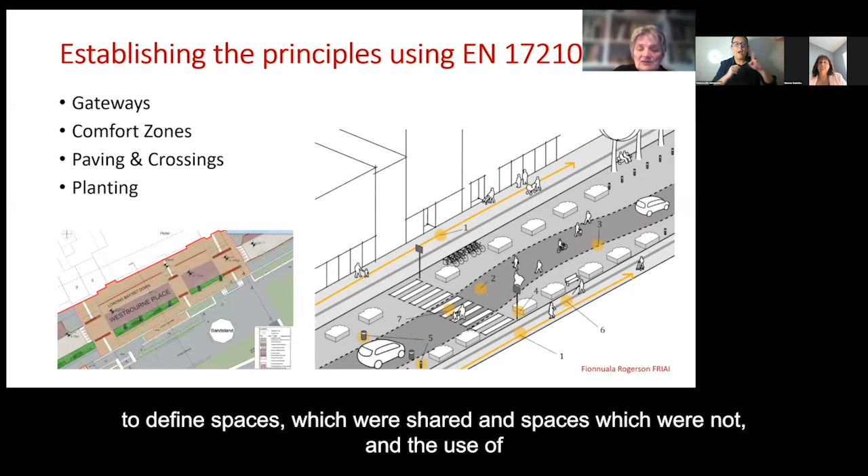We followed the guidance on pavings and crossings and on the use of colour contrast to define spaces which were shared and spaces which were not, and the use of planting and street furniture as well, in order to achieve the type of user-friendly environment that the design team were aiming for.

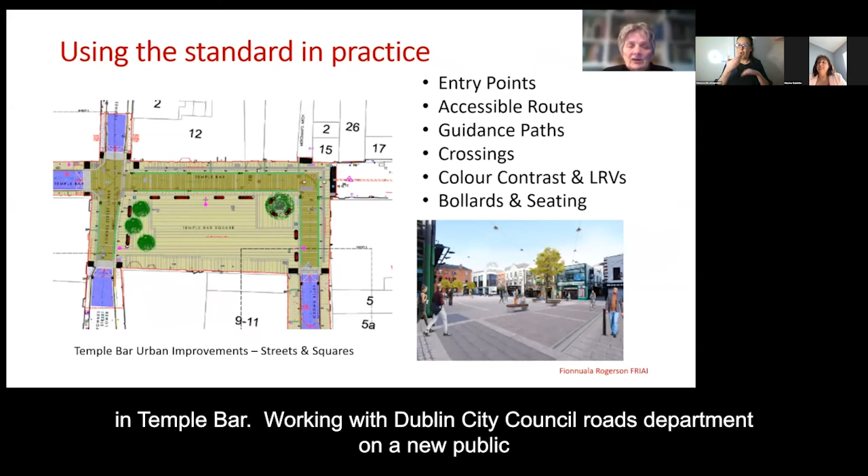And finally, I'm just going to mention a little bit about another project. This time it's in Temple Bar, working with Dublin City Council Roads Department on a new public realm improvement scheme for Temple Bar Square and the surrounding streets.

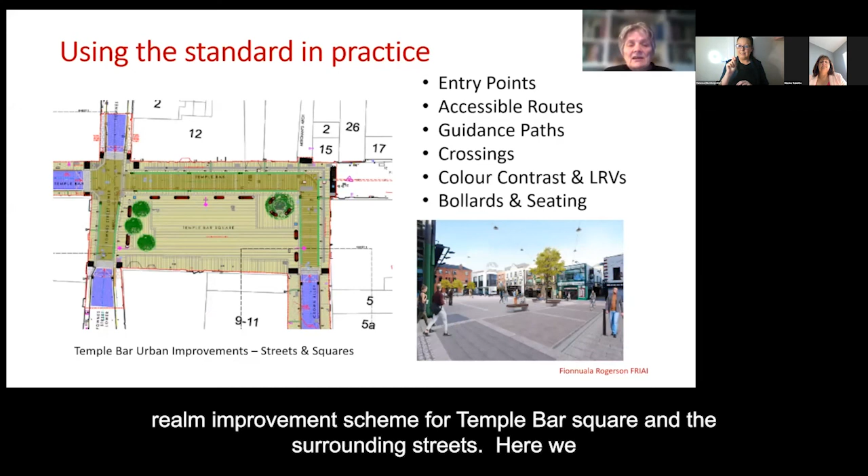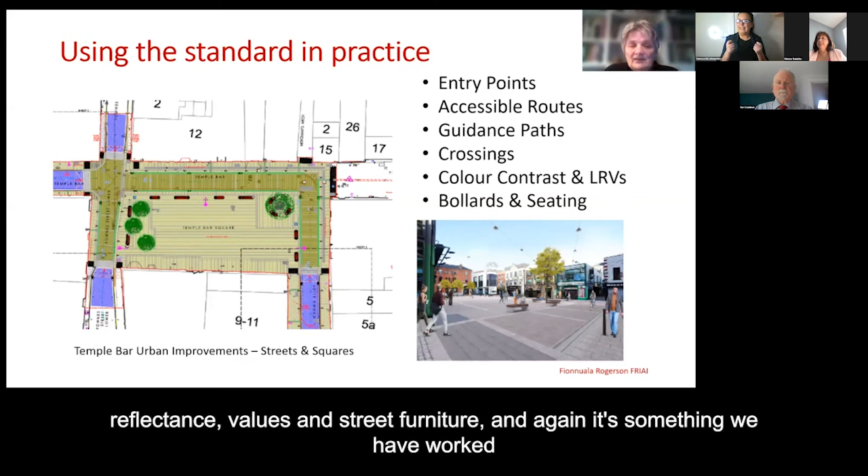Here we were able to follow the guidance on squares and using the guidance for accessible routes, guidance paths, crossings from one side to the other, colour contrast, light reflectance values, and street furniture. And again, it was something that we worked closely with users and other organisations on in arriving at the final scheme.

So to finish, I'd like to give a word of caution nonetheless, because not everything in these standards goes beyond TGDM. For example, the EN is based on a turning circle, if you like, of 1500 millimetres, whereas the technical guidance document to our Building Regulation M is based on 1800, so it's a higher standard.

Not everyone is covered by it as well. I've had reason recently to look to see if there was much information on bariatrics and type 3 obesity, and no, there isn't — there's actually not very much at all. So there is a lot of space too for improvement.

And one other word of caution: building regulations take precedence if you're faced with having to take a decision. But nonetheless, I would strongly recommend that all of you consider purchasing a suite of these standards, because there's a lot of information there which will be extremely useful to you in practice and will help in broadening your horizons in terms of the kind of information available for all the areas that Part M does not cover. So thank you very much indeed.